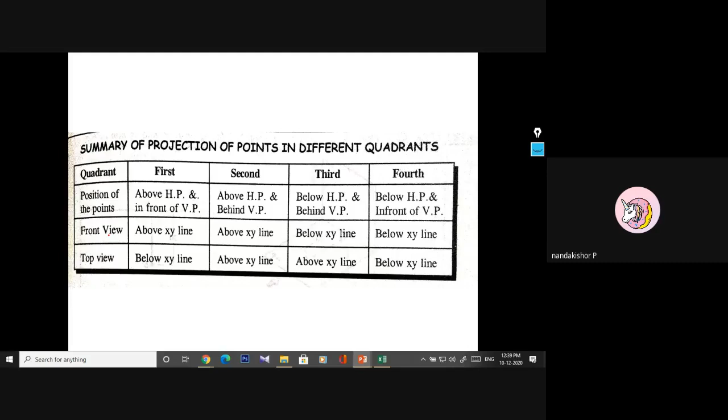ഹലോ സാർ, കേൾക്കാമോ സാർ? സാർ മ്യൂട്ടാണ് സാർ. സോറി, മ്യൂട്ട് ആയിരുന്നല്ലോ, ഞാൻ ശ്രദ്ധിച്ചില്ല. താങ്ക്സ് ഫോർ ദ ഇൻഫർമേഷൻ. സോ ഇതുപോലെ അബദ്ധങ്ങളൊക്കെ പറ്റാറുണ്ട്, പറഞ്ഞു തന്നാൽ മതി. സോ

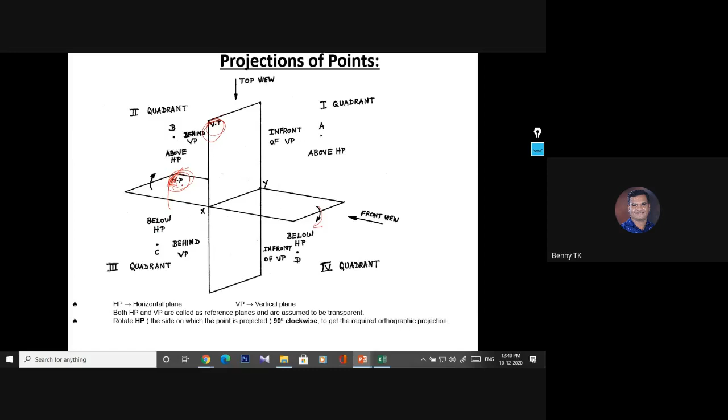ആദ്യം തൊട്ട് മൂലം പറയാം. ഇൻ ദ ഫസ്റ്റ് ക്വാഡ്രന്റ് ബോത്ത് HP ആൻഡ് VP, HP എന്ന് പറയുന്നത് ബിലോ XY ലൈൻ, അതായത് പ്ലെയിൻ റൊട്ടേറ്റ് ചെയ്യുമ്പോൾ പ്ലെയിൻ ഗോസ് ഡൗൺ. വെൻ പ്ലെയിൻ ഗോസ് ഡൗൺ, HP വിൽ ബി ബിലോ XY ലൈൻ ആൻഡ് VP എന്ന് പറയുന്നത് ഈ XY ലൈനിന് മുകളിലായിരിക്കും. ആൻഡ് ഇൻ ദ സെക്കൻഡ് ക്വാഡ്രന്റ്, when one side of the HP rotates, ഈ സൈഡിലെ HP മുകളിലേക്ക് പോകും. So both HP and VP will be above XY line in the case of second quadrant. In case of third quadrant, HP will be above XY line and VP will be below XY line. In the fourth quadrant, both HP and VP will be below XY line.

സോ ഈ ഇൻഫർമേഷൻ നിങ്ങൾ ജസ്റ്റ് ഒന്ന് അറിഞ്ഞിരിക്കുക, എന്തൊക്കെയാണ് നമ്മൾ ഇപ്പോൾ പറഞ്ഞതെന്നുള്ളത്. ഫസ്റ്റ് ക്വാഡ്രന്റിലാണെങ്കിൽ HP യുടെ VP യുടെ പൊസിഷൻ എവിടെ, സെക്കൻഡിലാണെങ്കിൽ എവിടെ, തേർഡിലാണെങ്കിൽ എവിടെ, ഫോർത്തിലാണെങ്കിൽ എവിടെ എന്നുള്ളത് ജസ്റ്റ് ഒന്നുകൂടെ പറയാം. ഇഫ് ഇറ്റ് ഈസ് ഇൻ ദ ഫസ്റ്റ് ക്വാഡ്രന്റ്, HP will be below XY line

and VP will be above XY line. In the second quadrant, both HP and VP will be above XY line. In the third quadrant, HP will be above XY line, VP will be below XY line. And in the fourth quadrant, both HP and VP will be below XY line.

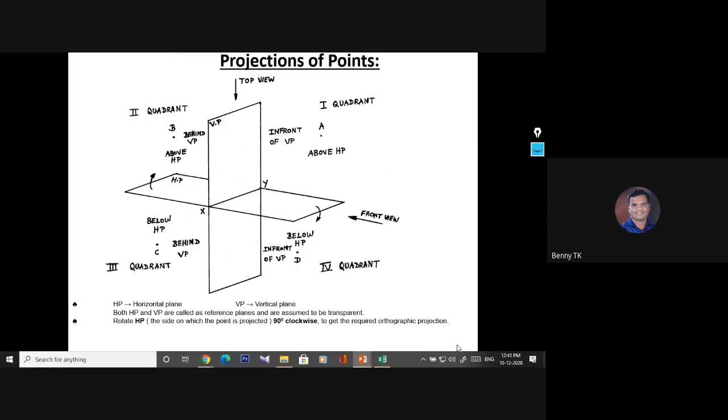ഈ front view ആണ്, ഇതും ഫ്രണ്ട് വ്യൂ ആണ്, ഇതും ഫ്രണ്ട് വ്യൂ ആണ്, ഇതും ഫ്രണ്ട് വ്യൂ ആണ്. സോ എനിത്തിങ് വിത്ത് റെസ്പെക്ട് ടു HP എന്ന് പറയുന്നത് ഇസ് ഫ്രണ്ട് വ്യൂ. എല്ലാ HP യിലെ റെസ്പെക്ട് ചെയ്യുന്ന പറയുന്ന എല്ലാം ഫ്രണ്ട് വ്യൂ ആണ്. ഇതെല്ലാം ടോപ്പ് വ്യൂ ആണ്. So this is also top view. So ഇതെല്ലാം ടോപ്പ് വ്യൂ ആണ്.

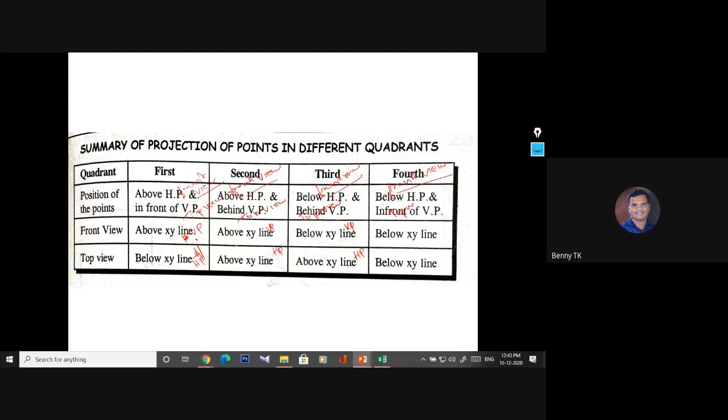സോ ഇതാണ് നമ്മൾ പറഞ്ഞത് എബോ XY ലൈൻ. സോ ഈ എബോ XY ലൈൻ എന്ന് പറയുന്നത് ഫസ്റ്റ് ക്വാഡ്രന്റിൽ ആണെങ്കിൽ ഇത് VP യിലും, എബോ XY ലൈൻ ഇസ് ഇൻ VP ആൻഡ് ടോപ്പ് വ്യൂ ബിലോ XY ലൈൻ ഇത് HP ആണ്. HP XY ലൈനിന്റെ താഴെയും, ഇത് HP, ഇവിടെ ബോത്ത് എബോ XY ഇത് VP, ഇത് HP യും, ഇത് രണ്ടും എബോ XY ലൈൻ ആണ്. ഇവിടെ ആകുമ്പോൾ ബിലോ XY ലൈൻ VP, ഇത് HP ആവും. ഈ ഫസ്റ്റും സെക്കൻഡും തമ്മിലുള്ളത്, ഫസ്റ്റും തേർഡും തമ്മിലുള്ളത് നോക്കി, ഇത് രണ്ടും നോക്കി, ജസ്റ്റ് തിരിഞ്ഞു എന്നേ ഉള്ളൂ.

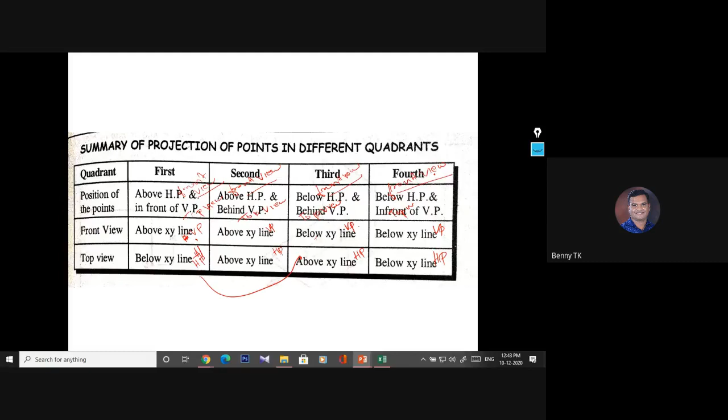ഇവിടെ വന്നപ്പോൾ എബോ XY ലൈൻ ആണ് VP, ഇവിടെ ബിലോ XY ലൈൻ ആണ് VP. ഇവിടെ വരുമ്പം ബിലോ XY ലൈൻ ആണ് HP, ഇവിടെ വരുന്നത് എബോ XY ലൈൻ ആണ് HP. ഇവിടെ രണ്ടും ഇത് VP യും ഇത് HP. സോ ഇതാണ് നമ്മൾ ലാസ്റ്റ് ക്ലാസ്സിൽ പഠിച്ചു നിർത്തിയത്. ഇനി ഇതിന്റെ ഒരു ഡീറ്റെയിൽ ആയിട്ടുള്ള ഒരു സംഭവമാണ് നമ്മൾ ഇനി ഇവിടെ ഞാൻ ഈ എഴുതിയിടാൻ പോകുന്നത്.

സോ ഇതൊന്ന് നിങ്ങൾ എഴുതിയെടുക്കണം. ഇതാണ് ഞാൻ ഇപ്പൊ ഈ മുന്നേ പറഞ്ഞ കാര്യങ്ങളെല്ലാം, what I have described in previous slides all are here. So anything with respect to HP will be on VP. Anything with respect to VP will be on HP. അതേപോലെ നമ്മൾ ഇതാണ് ആദ്യം പ്രീവിയസ് പഠിച്ചത് - ഫ്രണ്ട് വ്യൂ ടോപ്പ് വ്യൂ എവിടെയാണ് വരുന്നത് എന്നുള്ളത്. ഫസ്റ്റ് ക്വാഡ്രന്റ് ആണെങ്കിൽ ഫ്രണ്ട് വ്യൂ will be on the VP and top view will be on HP. Like that in the second quadrant also.

In the second quadrant also, if the point B is here, B dash will be here and B. So this is the top view and this is the front view.

This is called the front view, this is called the top view. In the third quadrant, if C is here, C will be here, C dash will be here, and if a point D is here, D dash will be here and D will be here.

So looking at where all top views are located, whether it's A, B, C, or D, all top views are in HP, and all front views A dash, another front view D dash, another front view C dash, and another front view B dash - all front views are in VP. Please learn this without looking.

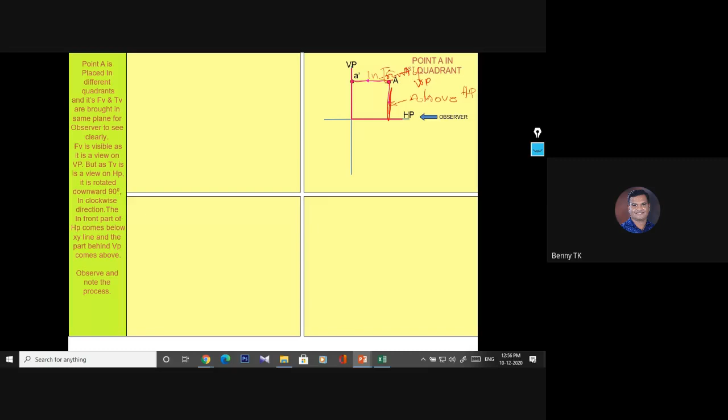So if we say first quadrant, this distance is above HP, and this is in front of VP. This is above, in front of VP, and this is above HP. That is what is meant. This is in front of VP and above HP. Then we know that in the first quadrant, this HP plane will be rotating in clockwise direction. If this HP is rotating in clockwise direction through 90 degrees, then HP will come right below this line.

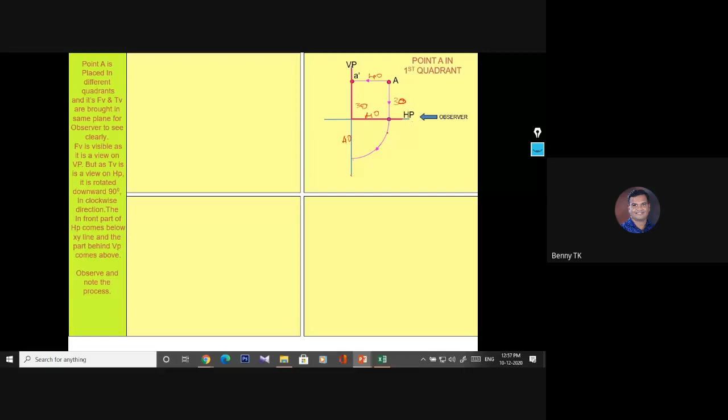So 40mm we will get B here. So that way when we rotate B, we will be here. Sorry, not B, it is A, point B... A, and this is also A.

So A will be getting here. So in the second quadrant, both HP and VP will be above XY, right? So this point is what is called XY.

Since we view it at 90 degrees, a line will be seen as just a point when it is held perpendicular to our eye. A line, if it is perpendicular to our vision, will appear as a point, not as a line. If it is inclined or parallel to your vision or eye, only then will it appear as a line. If the line is perpendicular to your eye, then that line will appear as a dot. So XY is a line, but in this case it is shown as perpendicular to your vision, so the line XY will appear as a dot. Is that clear? If a line is perpendicular to your vision, it will appear as a dot, so you don't know whether it is a line or not.

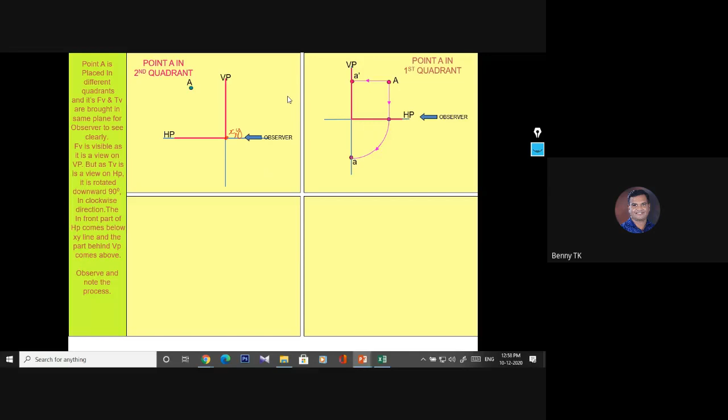The same case happens in graphics as well. If the vision is not perpendicular to your eye... if the vision is perpendicular to your eye, then that line will be appearing as a point. So XY is a line, but in this case it will appear as a dot. And in the second quadrant, both HP and VP, when the plane rotates, will be above the XY line.

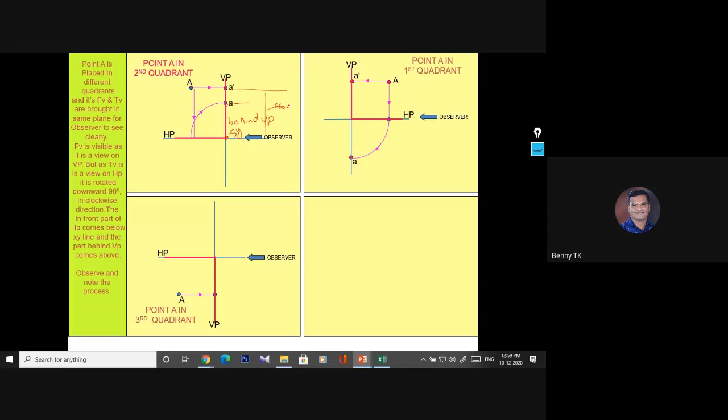In the second quadrant, HP will be going up. So here, this distance is behind VP, and this is above HP. So above HP means it is the front view. HP, as we said, relates to front views. Anything with respect to HP on VP, that which comes on VP, is the front view.

So it is named A dash. So anything with respect to VP will be on HP. That which comes on HP is the top view, which will be named A.

So this is where the point is. So this is below HP, and this is behind VP. So anything with respect to VP will be on HP, that's why this is A.

Whatever comes on VP, when it comes on VP, that will be the front view. Anything with respect to VP will be on HP. So anything on VP is front view. Sorry, anything on HP is top view. Everything on HP is top view, everything on VP is front view.

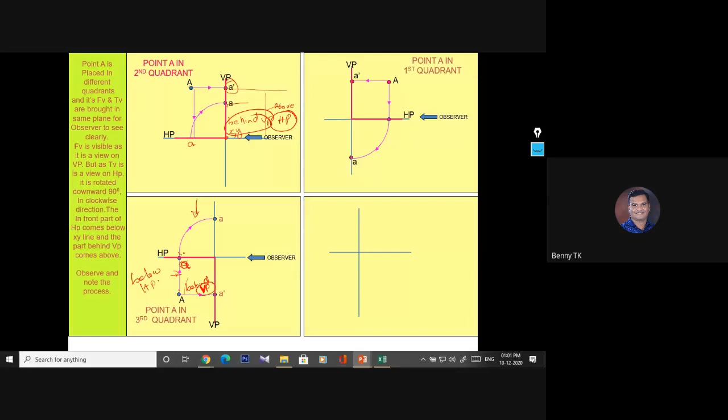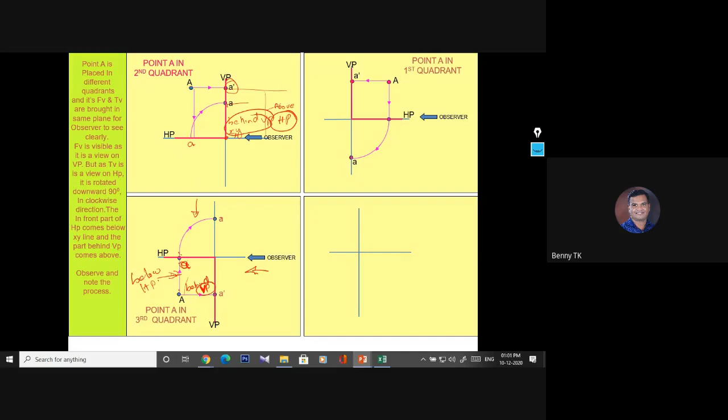So that will be seen on A, and that will be rotated towards the upper side. And below HP, this height distance can be seen from this side. So the observer position will always be from the right side. Looking from the right side, this is the height. So that means the right side means front view. Our front view height will be seen here as A dash.

In the fourth quadrant, since the plane is rotating in clockwise direction, both A and A dash will be below the XY line.

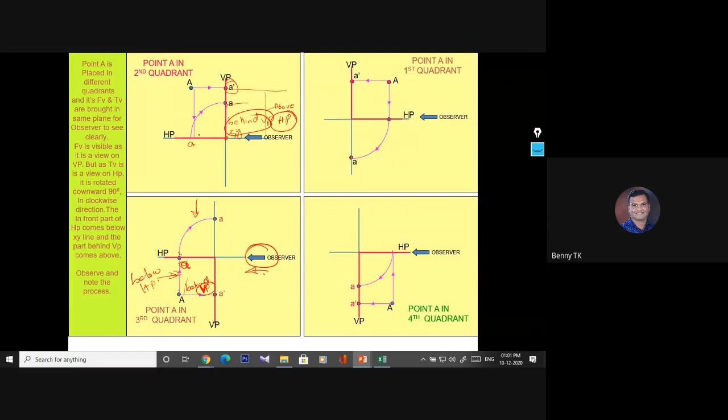Okay, so now this is how we draw a figure. The extreme right side is not seen. In a question, you will be asked to write the answers. If a question has been asked, this is how you answer the question. This is how we write the answer.

Not all these things we have studied earlier. We haven't studied all these things before, just this much we need to show. That's why we studied dimensioning. Do you understand why we studied dimensions? This is how we mark the dimensions. And we studied what A and A dash mean.

If it is A dash, you have to understand it is a front view. If it is A, that means it is a top view. So a front view and top view are differentiated by their naming. If it is A dash, you have to understand that it is on VP and it is a front view. If it is without dash, then you have to understand that it is on HP and it is a top view.

You have to understand this. So this is the answer you have to draw for this particular question. This is how you should answer this particular question. This is a simple question, just the introduction part, not the actual problems you will solve in your regular classes. This is a sample problem. In this introduction class, you just need to understand the concepts, and for that, all these things are being explained here.

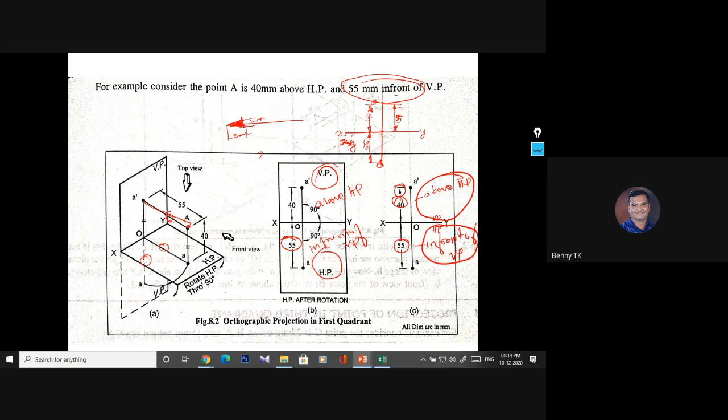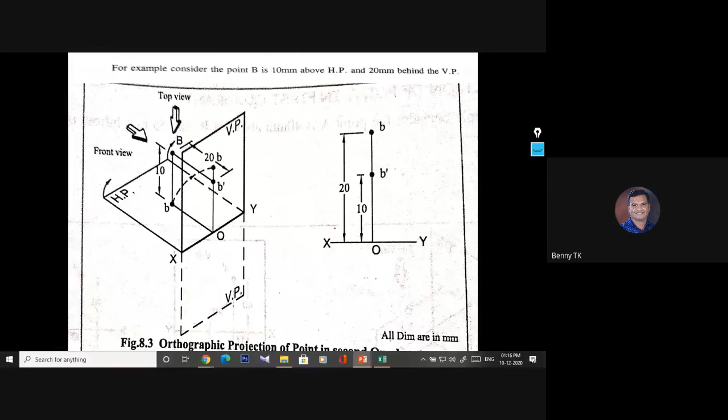So the next one, this is in the third quadrant. How we can understand this? This is 20 mm below HP, 25 mm below HP, and 15 mm behind VP. So this matters, below HP and behind VP matters. That means it should be in the third quadrant. So if it is in the third quadrant, 25 mm, you need to draw this. In your notes, draw only this item, this one thing is enough. Don't draw this, it's just for understanding, since it is the first class, just to understand the concept of this quadrant, it is given here.

So first draw XY, then locate the center point, then draw vertical lines. On that line locate the points C and C dash, C and C dash. So this is the center point.

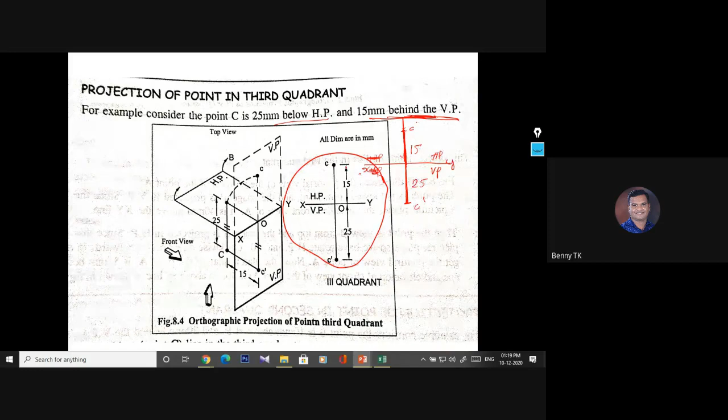Here we don't need this, marking here is enough for HP and VP. HP is above the XY line and VP is below the XY line. Behind VP means it is on HP, behind VP. So for points on HP, we name them without dash. Then it is below, 25 mm below HP, that means it will be on VP, below HP. So this is 25 mm and this is 15 mm. That is what we have marked here. So this is the solution for this particular question.

And for case 4, this is the fourth one. Fourth case is it is in the fourth quadrant. How do we understand that it is below HP and in front of VP? Below HP means below the XY line or below the plane, and in front means above the plane. So in front of VP and below HP. So below HP can be seen on VP. That means A dash, so D dash on... sorry, below HP means on VP.

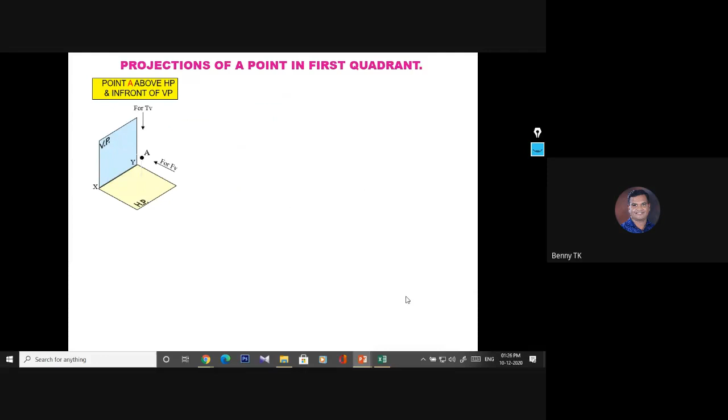That is 2.5 centimeters, usually instead of 25 centimeters or 25 mm. For a 2.5 centimeter question, you have to mark it as 25 without unit. In the question's final figure, if units like 25 mm or 15 mm aren't written, or the question doesn't specify, assume all dimensions are measured in mm.

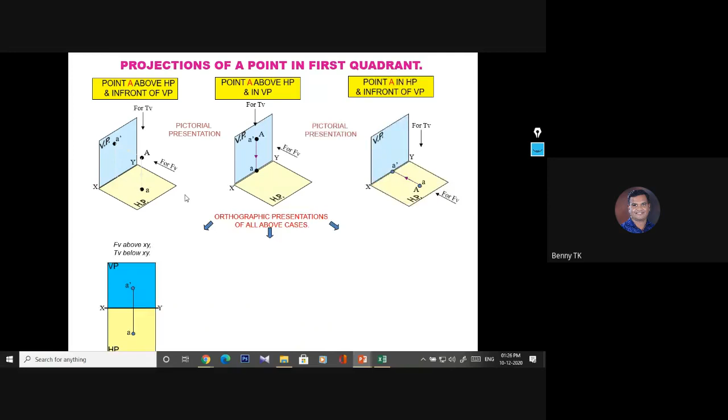So in HP and in VP will be like this. In VP and above HP will be like this, and in HP and in front of VP.

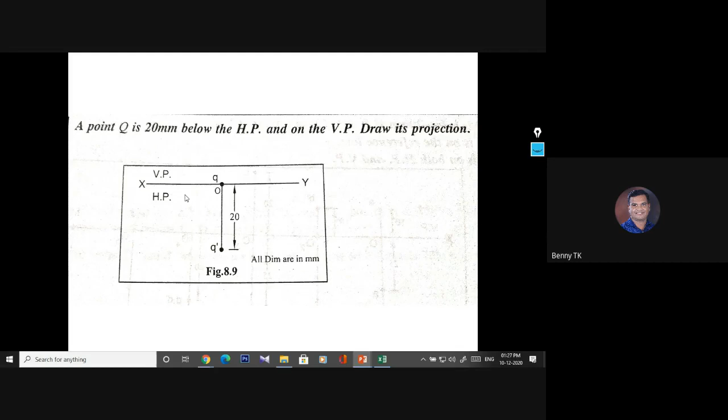30 mm in front of VP and P is lying on HP, so this will also be the first quadrant.